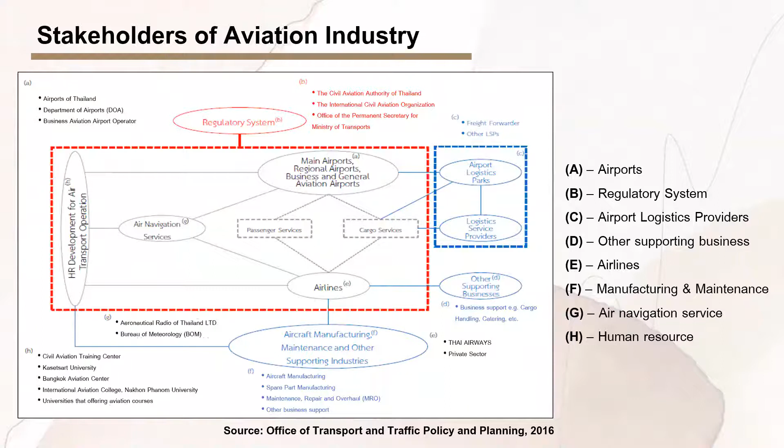Today I'm going to present my research on Special Skill and Workforce Development in Aviation Maintenance, Repair, and Overhaul, or MRO industry. In aviation industry we can divide into 8 group stakeholders, consisting of airport, regulators, logistic provider, supporting business, airlines, manufacturing and maintenance, navigation service, and human resource. In this research we will focus on manufacturing and maintenance and human resource.

Now Thailand wants to be an aviation hub, so they released 3 development plans to make an aviation hub. The first one is the 12th National Economic and Social Development Plan. This plan is for the operational level. They make the infrastructure and they need the cooperation in international cooperation and national cooperation.

The second is Industry 4.0 Policy Plan. Aviation and logistics is the new S-curve, or new industry, that Thailand wants to develop. And the third is Eastern Economic Corridor. This is a development plan in 3 provinces in the east of Thailand: Chonburi, Rayong, and Chachoengsao.

The information from Airbus shows the number of aircraft in Asia increasing around 35%, which is higher than other regions. So the trend of the aviation industry has come to Asia.

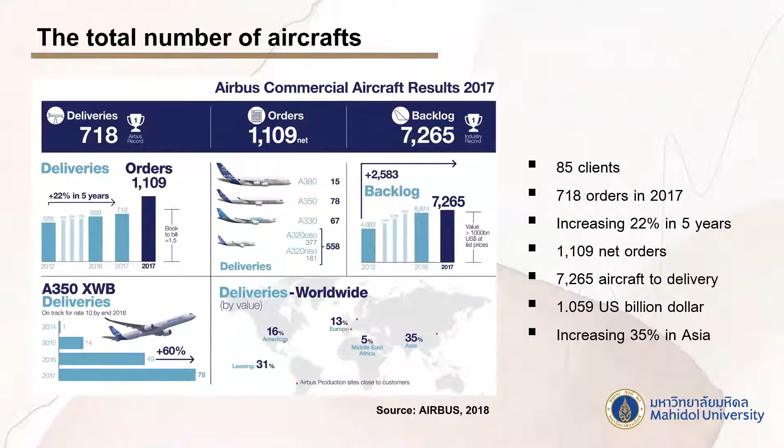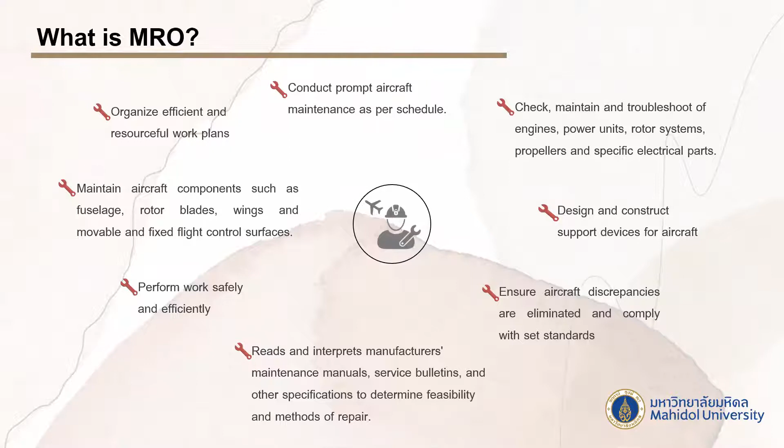MRO is aviation maintenance and overhaul. From before the aircraft takes off until after it lands, the responsibility of MRO workforce is to organize efficient and resourceful work plans, maintain aircraft component checks, maintain and troubleshoot aircraft systems, construct support devices for aircraft, read and interpret maintenance manuals, and ensure aircraft comply with set standards.

This research wants to analyze the gap between workforce demands and the skills current curricula offer in terms of aviation maintenance, repair, and overhaul industry. This research was studied before the COVID-19 situation.

In this research we divide the study into 2 sides: the demand side and the supply side. In the demand side, we collect data from government policy, international standards, and industry demand. In the supply side, we collect data from current curriculum and practical training. After that, we find the gap between the demand side and supply side.

This research has 5 steps to complete. The first is identify research problems. Step 2 is literature review. Step 3 is data collection. In this step, we need to collect data in two parts.

First, we collect data from international standards, other MRO curricula, and literature review. Second, we collect data from aviation maintenance curricula that Thailand offers. Step 4 is gap analysis. After we have data from both supply side and demand side, we use gap analysis to find the gap between the two sides. The last step is analysis and conclusion.

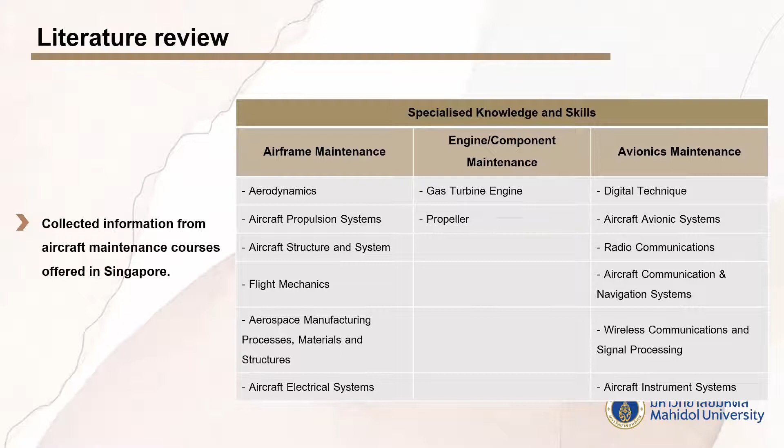For the demand side data, we collect data from aviation curriculum. This one comes from Singapore, and we focus only on special knowledge and skills from the Singapore curriculum, which can be classified into 3 parts: airframe maintenance, engine maintenance, and avionics maintenance.

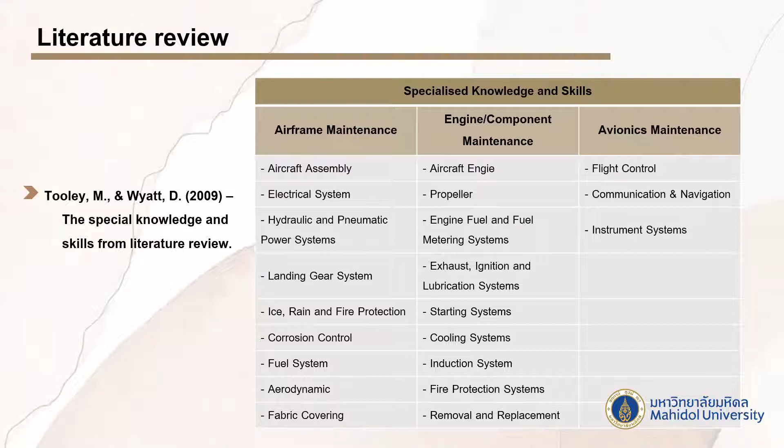This slide shows information from the literature review studying special knowledge and skills for the MRO industry, which can be classified into the same parts as the Singapore and international standards.

For special knowledge and skill of MRO in Thailand, we studied the aviation academic courses from the Civil Aviation Training Center, or CATC, and divided them into three groups.

After we collect the data from both demand side and supply side, we use gap analysis to find the gaps that Thailand's aviation courses lack, which can be divided into 3 groups.

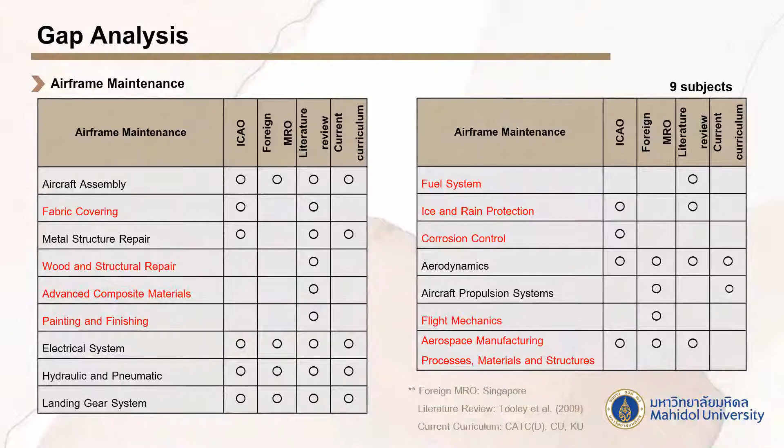The first group is airframe maintenance. Thailand needs to add and develop 9 subjects: fabric covering, wood and structural repair, composite material, painting and finishing, fuel systems, ice and rain protection, corrosion control, flight mechanics, and aerospace manufacturing.

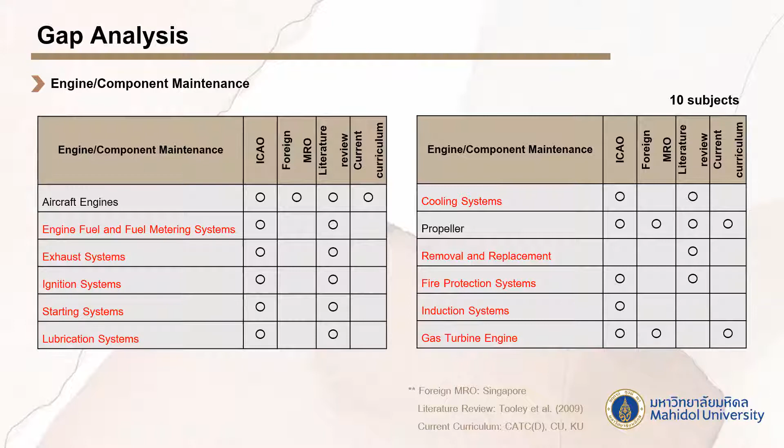Group 2 is engine maintenance. Thailand needs to develop and add 10 subjects: engine fuel, exhaust system, ignition, starting, lubrication system, cooling system, removal and replacement, fire protection system, induction system, and gas turbine engines.

The last group, group number 3, is avionics maintenance. Thailand needs to add subjects about radio altimeters, autopilot, full authority digital electronic control, and electronic engine controller.

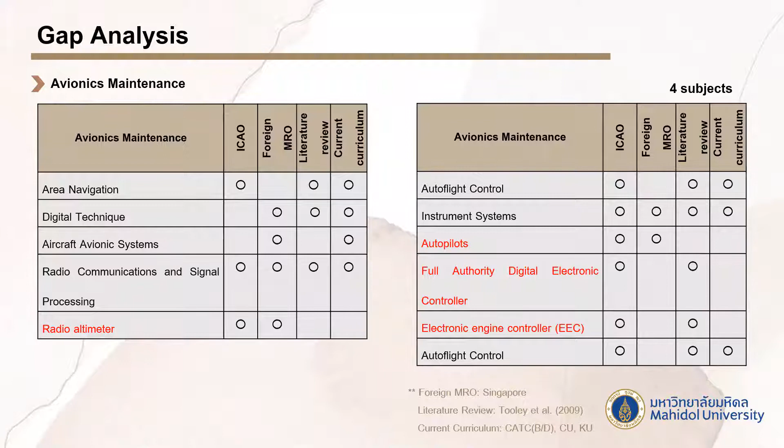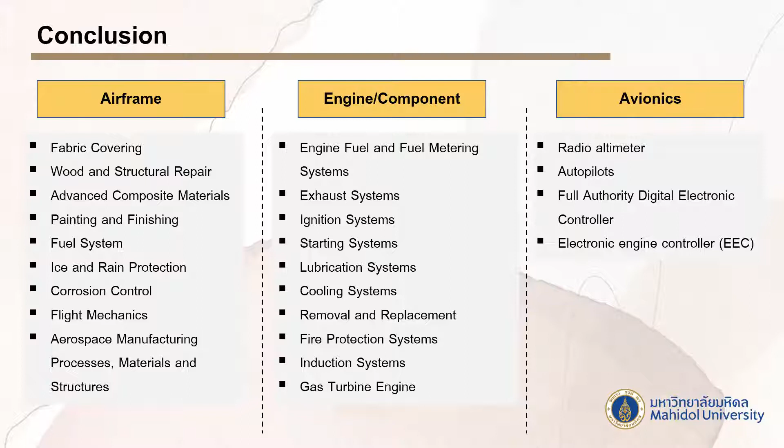All of the subjects that Thailand needs to add and develop about aviation maintenance courses total 23 subjects, and these subjects can help Thailand meet the standard, and Thailand can receive more foreign aircraft for MRO because Thailand wants to be the aviation hub, so knowledge and skill that meets the standards is important to maintain the aircraft.

For future research, we should study the important subjects that should be given first priority and developed first, and also study the potential of the country to develop those subjects or not.